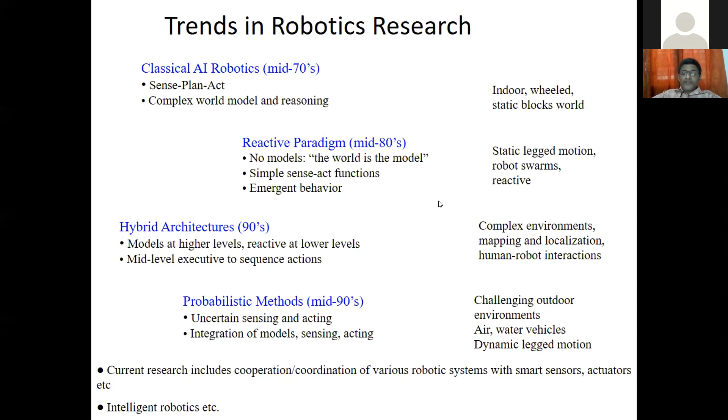I'm going to give you a basic idea, not in detail. One of the important topics - those who are in electronics or electrical background can do much more on this than mechanical people - but this is purely related to optimization and communication.

Then swarm robotics - you know what is swarm robotics? A number of robots will be there, and they will communicate with each other, and at least one robot will do one objective. Suppose you are making a swarm of 10 small robots, and suppose you are hitting a target - I will be sending 10 robots, and in between some robots may have some issue and stop working. Suppose after some time 5 robots have an issue and are not working, the remaining 5 will communicate with each other, and at least one will do the operation. So in the US, NASA and some universities have implemented this kind of swarm robotics.

Land itself, land robots.

So land swarm robot means wheel robot or tractor or any small robot - thousands or hundreds of robots communicating with each other, and at least one robot will achieve our goal or objective. This can also be done underwater, and in aerial robots too, where 100 robots communicate with each other to reach a target or achieve some particular goal. That is swarm robotics.

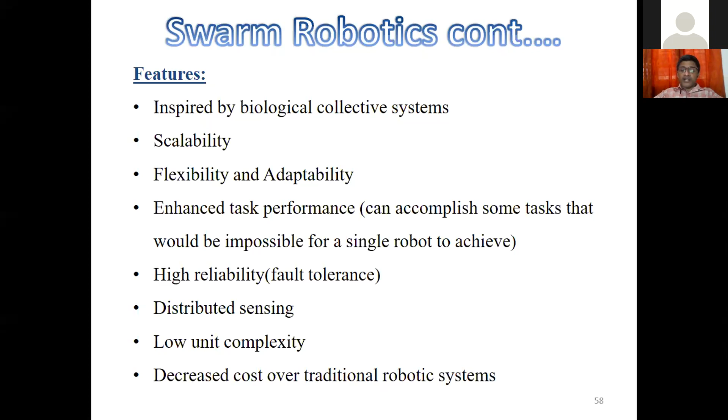This is one area which those interested in electronics or electrical background can focus on. There's a lot of scope for research, mainly aerial, but you can also do land, underwater, or aerial, or hybrid. You can integrate aerial with land, underwater, or water into a hybrid collective form of swarm robotics in this area.

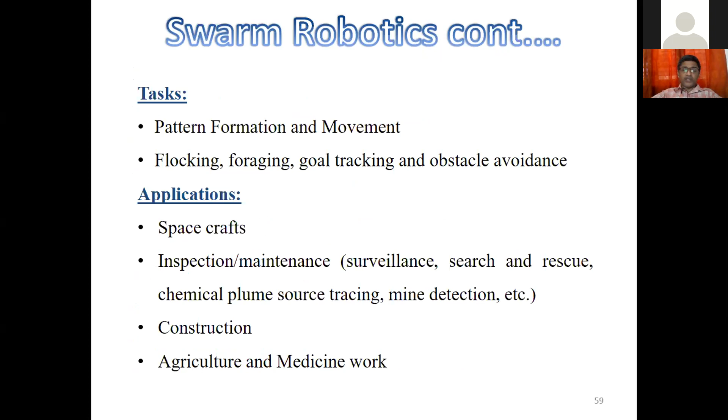The applications are very important - spacecraft inspection, maintenance, surveillance, search and rescue, chemical source tracing, mine detection, construction, agriculture, and medical robotics. That's one area. Another area is dual arm robots.

For example, we have 2 arms. Generally you see robot manipulators with 1 arm, but if you have 2 arms, we call it a dual arm robot. These 2 arms can be used for coordinated work - these robots can perform assembly operations or coordinated tasks between the hands. So that's another important research area.

These are the cameras you can implement - maybe with 1 camera also you can implement this. But human-like arms ensure safety, with an integrated controller for collaboration with the human worker. This robot collaborates with the human worker - productivity and flexibility is high, lightweight, easy to mount, agile motion, good cycle time, for parts assembly. This is another type of robot. You can either develop a dual arm robot or do different coordinations.

Even very accurate, specialized operations can be done - for example, you take a needle and thread. If the robot is able to move through the needle hole, it'll be very interesting, but it's very difficult to do that kind of operation. If a robot can do that, you can say this is a higher level of work, because we know robots aren't able to achieve even 5% of what a human can do. So there's a lot of scope in this area to achieve human-like operations.

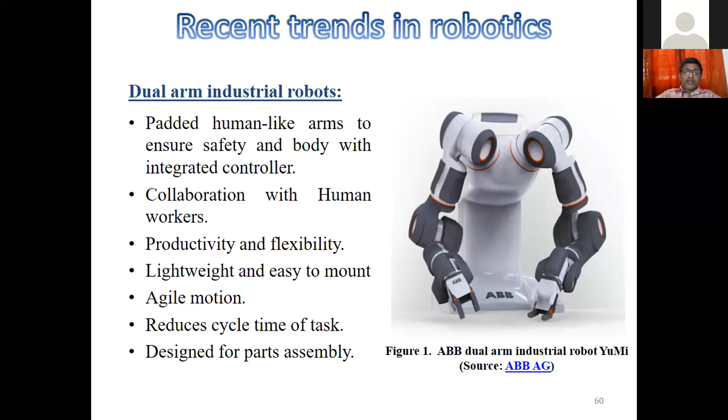Now this is another kind of dual arm robot - you can see the camera and the dual arms, with fast speed and precision, used for packaging, loading, machine loading, material handling, etc.

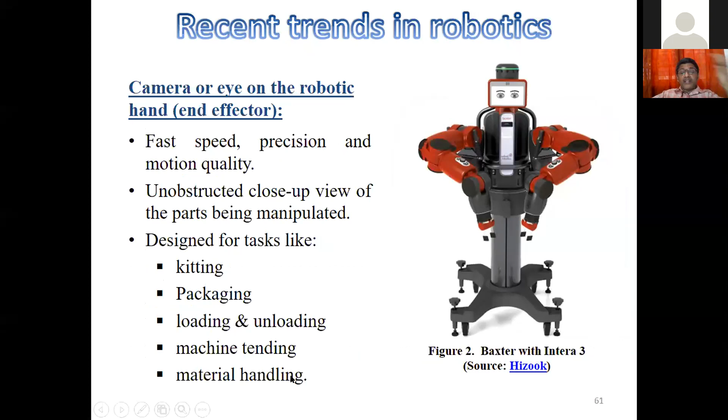Another important area is the wearable robot. A wearable robot is generally called a robot exosuit. These exosuits or wearable robots are implemented in the US military - after traveling long distances over difficult terrain, soldiers' muscles become weakened, and these problems can be overcome by using this kind of wearable robot.

Wearable robots improve and enhance the efficiency of soldiers or humans whenever required. Suppose efficiency has decreased to 70% or even 50%, the wearable robot can increase it to more than 100%. That is known as a wearable robot, or robot exosuit - soft robots for military and medical applications. There's also robot fabric for active clothing with embedded sensors, and a smart shirt - you may have heard of the smart shirt.

Depending on the climate, robot soldiers sometimes use this kind of smart shirt in the US and elsewhere. These smart shirts can be used for closed loop control of climatic conditions, adjusting body temperature based on climate and actual body temperature, so the person wearing the shirt stays comfortable.

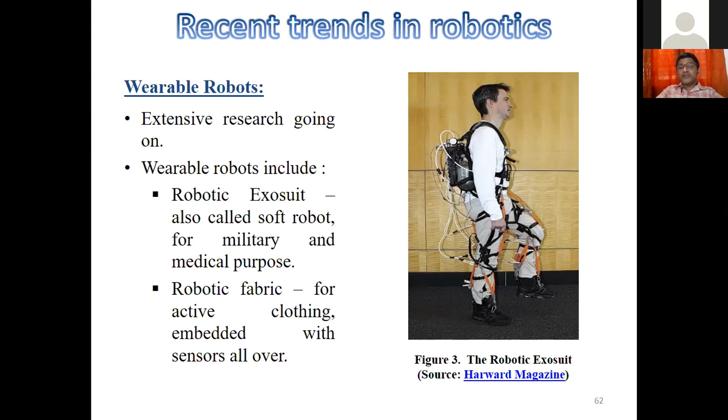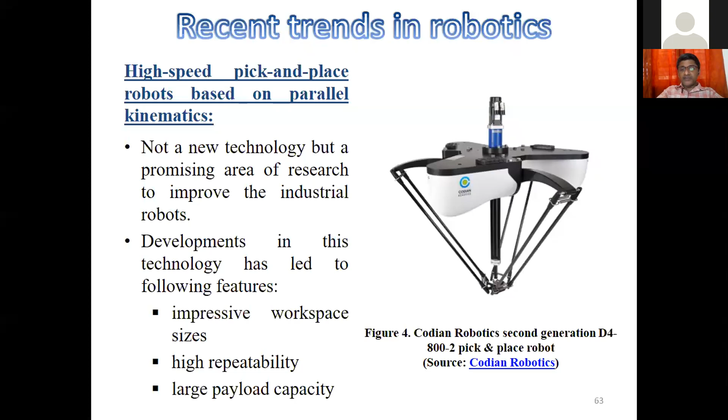Now, another area is parallel robots, pick and place operations, parallel kinematics, dynamics, and control. Compared to serial manipulators, flexibility and accuracy are higher, but the only problem is the large payload capacity and higher repeatability come with a limited workspace. We won't get as much workspace as a serial manipulator, but flexibility and stiffness will be higher for this type of robot.

Another area is prosthetics. A lot of research is going on here. Many prosthetic hands have been materialized, though still under development, including mind-controlled modular prosthetic hands. There may be EEG or EMG control, and based on that, the robot hand can be controlled to satisfy our requirements.

Suppose we think to pick an object, like taking a glass of water for drinking. The signals are analyzed through EEG, EMG, and EOG integration, and the required operations can be implemented using an EEG cap or EMG-EEG integration. That is another area, but a lot of algorithms still need to be tested and improved to increase accuracy and speed of motion.

There are few achievements in this field, like the modular prosthetic limb, which senses motion-based pattern recognition, giving not only control over limb movement but also touch sensing. You can develop a mechanism and integrate various sensors, including EMG and EEG, to implement vertical motions.

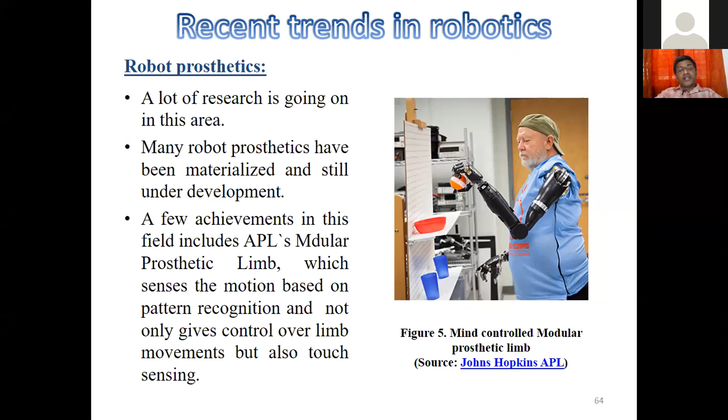For example, with a 2 degrees of freedom robot, if you're designing a teaching robot based on vision, you can make a single intelligent teaching robot and integrate EEG and EMG into it. As a teacher, what you implement in teaching can be implemented with a robot - that's another research topic. I'm posing some research problems you can take up, give to your students, or pursue yourself.

This is the unmanned aerial vehicle area I mentioned - nano drones for aerial photography and video recording, agriculture and Agribotix for precision agriculture, aerial robots, self-driving cars, unmanned drones, unmanned spacecraft, driverless trains, driverless cars, and driver-assistive cars. These are some of the important areas.

Those related to image processing, vision, and computer science - faculty and students - and even electronics students can focus on this, since they sometimes have more idea than mechanical students. This area is very useful for computer science, and mechanical students can handle the mechanical design. You can make a team and work on it.

One important shortcut to develop knowledge is, instead of going for departmentalization, you take an interest in students from electrical, electronics, computer science, or other branches of engineering including mechanical. You form a group and give some project, and they can add their own stuff and develop a lot of things.

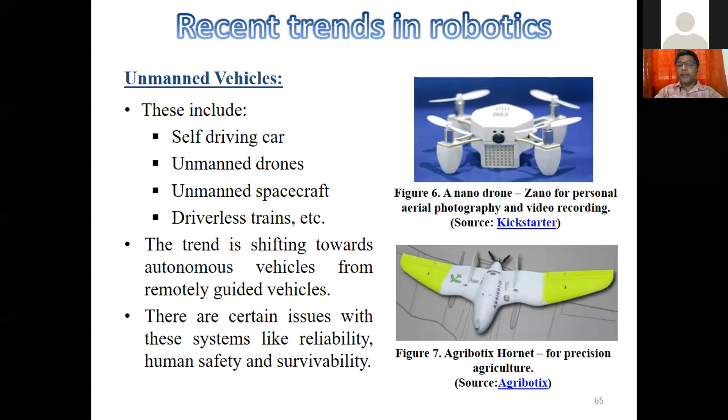Another area is nanorobotics, but in India, nanorobotics is not there. You can see a lot of universities abroad are doing nanorobotics. It's an emerging technology with potential applications in nanomedicine, targeted drug administration, used for cancer diagnosis and treatment of diseases, especially cancer, and on organic tissues like destruction of hepatitis C virus, which has already been tested.

The robots are tubular, about 20 microns long and 5 microns in diameter, coated in zinc. A micro motor powers the robot when delivered, and nanoparticles compound is directly injected into the tissue of a live mouse. So this is what I told, tested in the mouse.

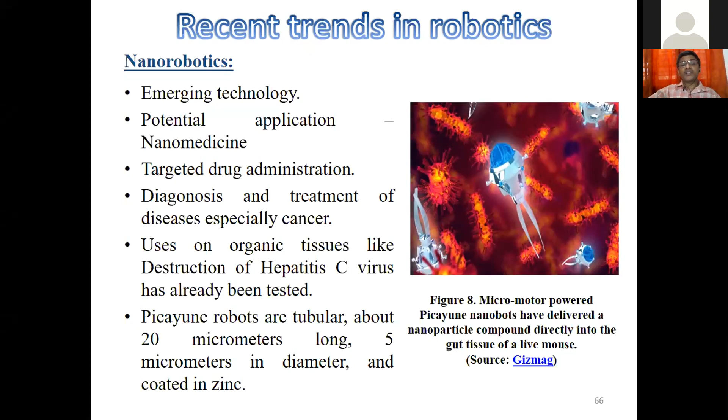So there's a lot of scope in the simulation and implementation work in this area, but we cannot do it in India, and we have to go for this kind of research in special types of universities.

Another is medical robots. You can go for surgery. Surgical robot is another area where you can develop a surgery using a master and slave mechanism. You have a master and a slave, and the slave does exactly the surgery, while the master is in the room and doctors control it so the same motion is incorporated in the slave, which can be used for doing surgical operations.

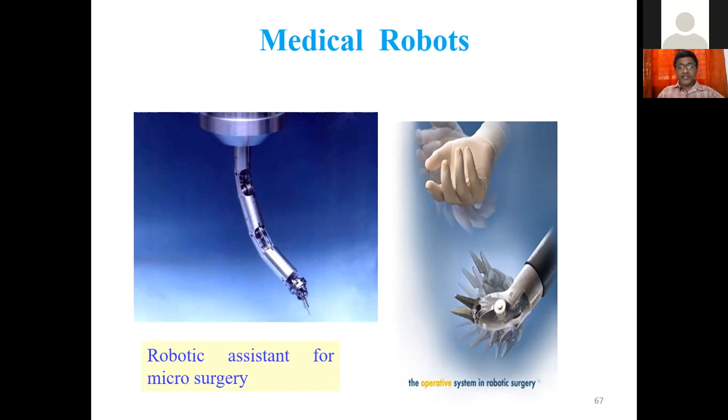Now this is robot assistive technology. There are a lot of mechanisms developed, but the real implementing part is missing, and the real output is missing. So there are a lot of things that can be integrated into assistive devices.

Another important area is agriculture robot. I have added this agriculture robotics because of the request. In agriculture, robots are used for sowing seeds, plantation, watering - these are some requirements we can use agriculture robots for. For example, I'll show you one project done by one of my students. I'll try to project that, I'll share that PPT.

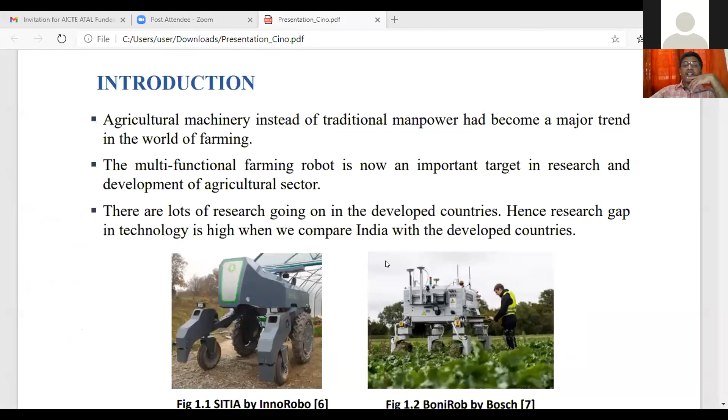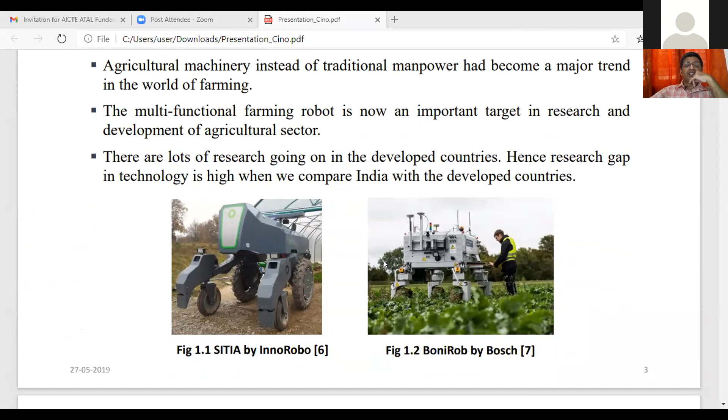In agriculture robots, machinery instead of traditional manpower has become a major trend in the world of farming. Multifunction farming robot is now an important target in research and development of agriculture. There's a lot of research going on in developed countries, hence the technology there is high compared to India. These are some of the robots for agriculture, and agriculture robot research is conducted for the following agriculture activities, so before going for this kind of research, you should know what the requirements are.

What is agriculture robot research conducted for? Harvesting, precision seeding, weed removal, fertilizing, watering of plants, spraying pesticides. Even aerial robots are now being used, almost in India also, for watering and spraying pesticides, picking, harvesting, seed mapping and reseeding, and plant health monitoring. So these are some of the requirements of robots in agriculture.

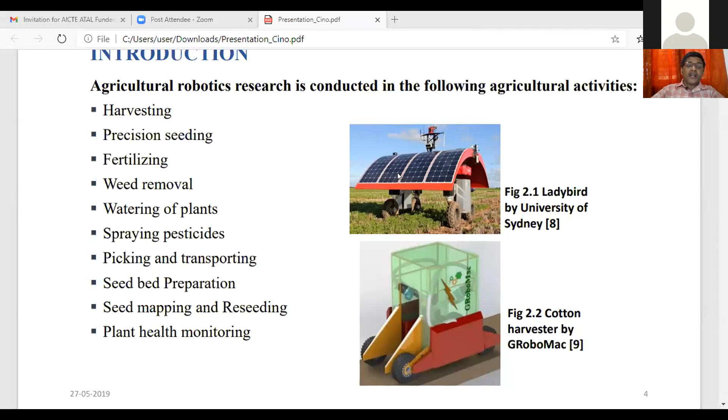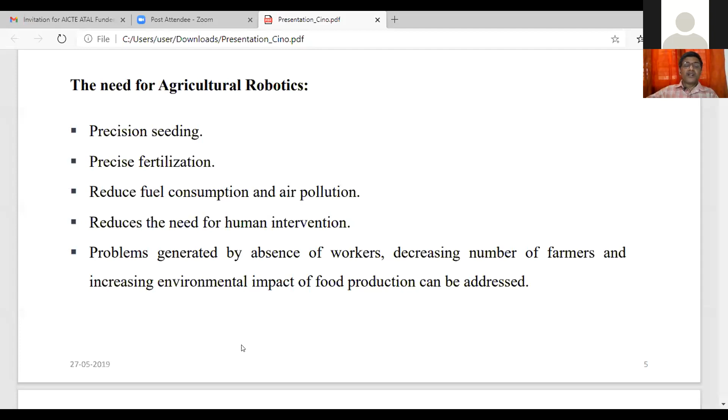See the need for agriculture robotics. See precision seeding, how precisely you can seed. Sometimes if the seeding is not proper, it will be an issue for the plant, so sometimes it won't grow. Now precise fertilization, reduced fuel consumption and air pollution, reduced need of human intervention, the problem of absence of workers, decreasing number of farmers, and increasing environmental impact of food production can be addressed. So these are some of the needs for agriculture robots.

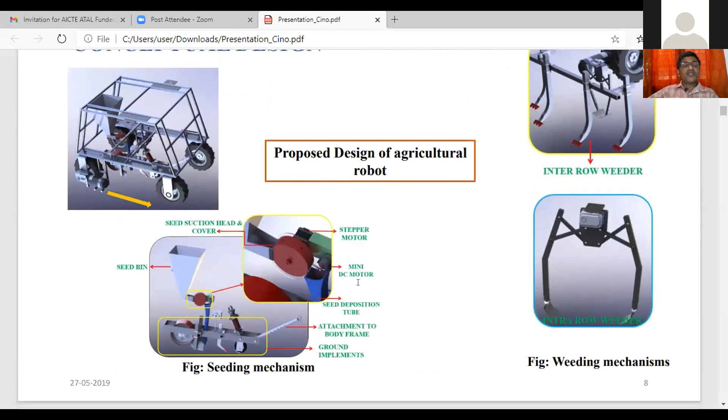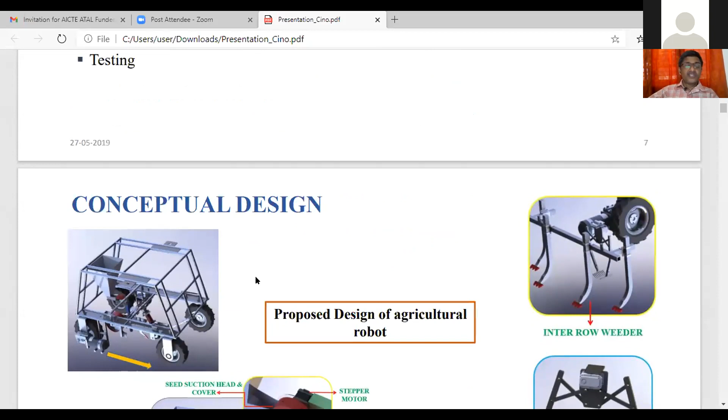What we have done is a conceptual design. The objective was to design, fabricate, and experiment with a multifunction robot for row crops in Indian conditions, implementing planting for row crops. The same robot can be used for harvesting also, if you add some other mechanisms like a plucking mechanism. If you add that, the same mechanism can be used for harvesting too.

But the problem is this robot can be used for flat terrain kind of thing, marshy field and all. We can additionally add some mechanism in the ground, in the bottom, and that can also be used. That also we have developed. But if you are going for other kinds of wheel mechanisms on marshy field, that can be improved. Only the bottom portion can be improved.

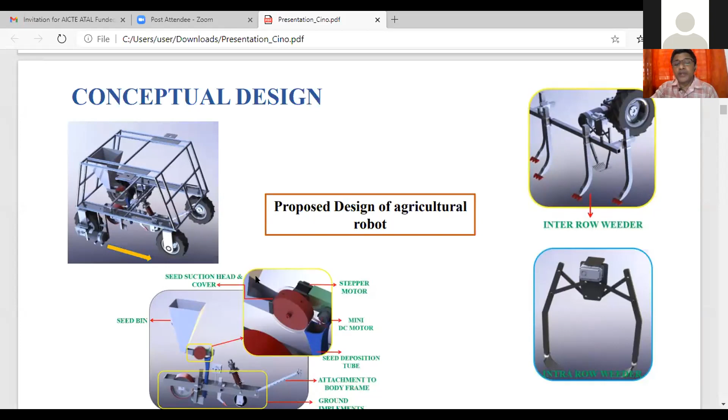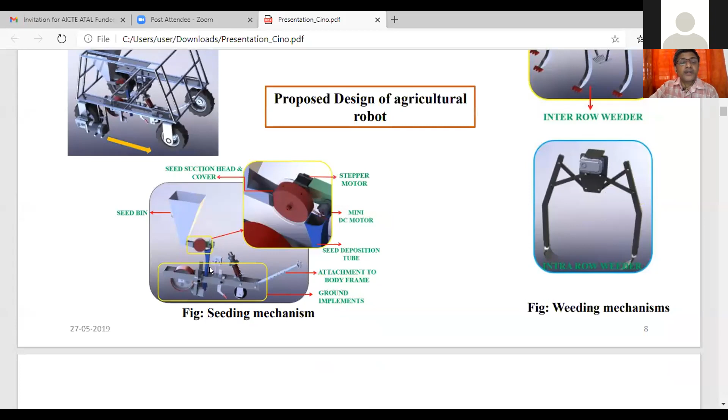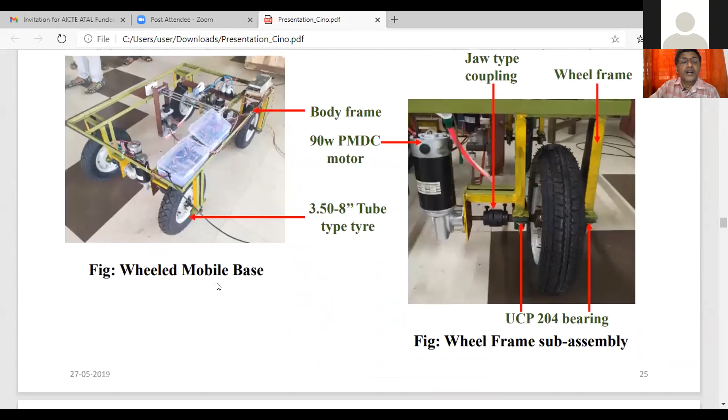Another thing is the seed feeding mechanism. You have a seed bin feeding to the mechanism, and while it's moving with uniform speed, digging and feeding is done by this particular robot. This is the robot we have fabricated and tested, with a wheeled mobile base, and we have implemented the steering.

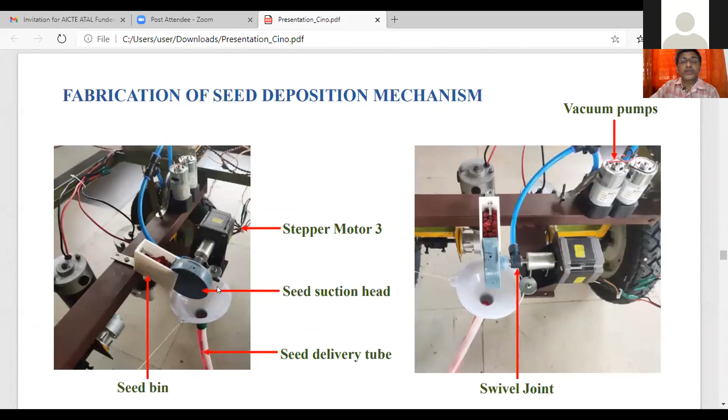So this is another one kind of robot. Then another kind of robot is, see... Stop sharing. Okay.

Another important type you can go for is related to another important issue with some poultry farms. It's very difficult to clean the poultry farms, so you can go for developing a poultry farm robot. We have developed a poultry farm robot, but I'm not having that slide.

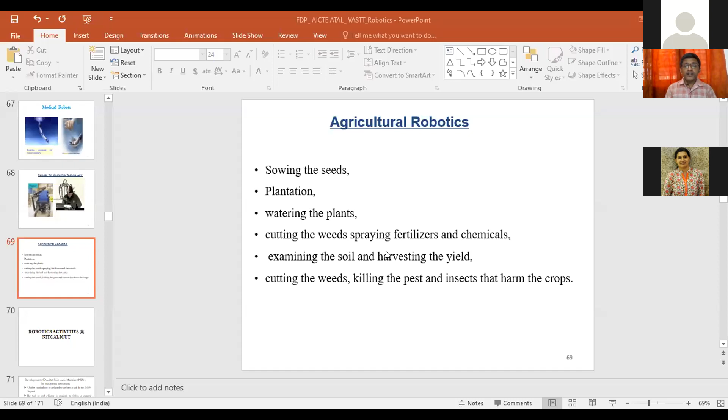We have developed a robot for watering the plants, spraying pesticides, and weeding. All those things can be done for agriculture, and also harvesting. Harvesting is another area - sorry, can you please enlarge the screen - depending upon the type of crop or item you have to harvest, you have to change the gripper, robot end effector. That itself is another research topic. Developing the end effector itself is another topic for harvesting.

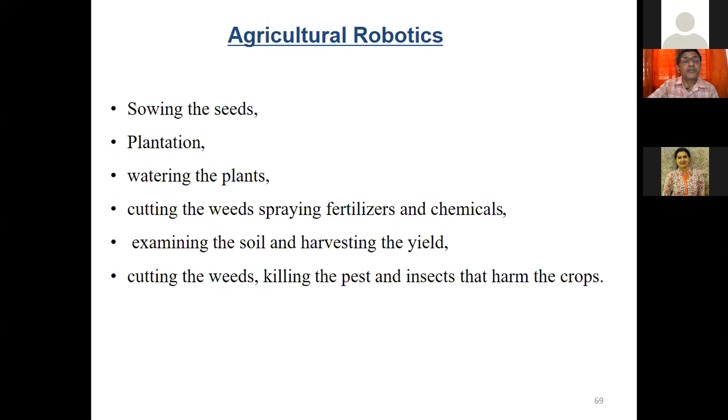So the first thing you have to do is clarify your objective. For that, you determine how many degrees of freedom you need, then go for design, then control. First you design the controller, fabricate it, implement and fine-tune the control, then test it. Sometimes you have to improve it, and finally you get a final product. That's how you develop the product. Now, this is an old slide with new slides added - I couldn't include some of the figures.

These are the robotics activities at NIT Calicut. I have developed some of these robots - I'll show you some. We have developed a lot of serial, parallel, and hybrid manipulators - serial manipulator, parallel manipulator, and hybrid manipulators - we have discussed and developed these.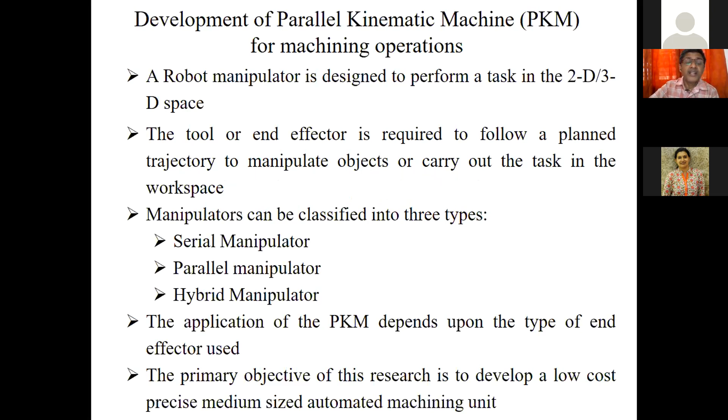Another important area is parallel kinematic machines - the development of parallel robots. When these parallel robots are used for some machining operation, we call them parallel kinematic machines, PKM. So a parallel kinematic mechanism, when used for machining operations, we call a parallel kinematic machine. That is a very important research area.

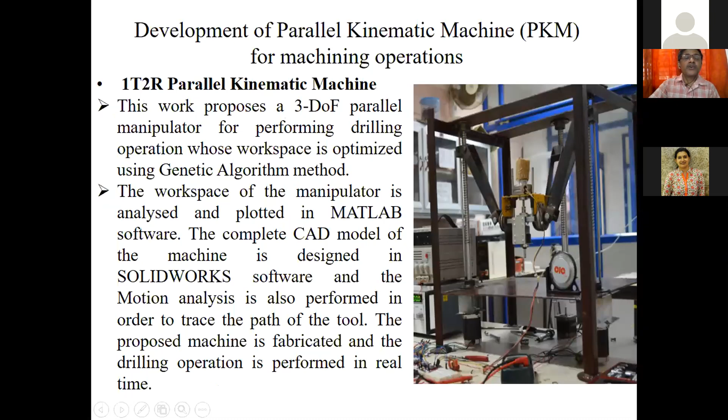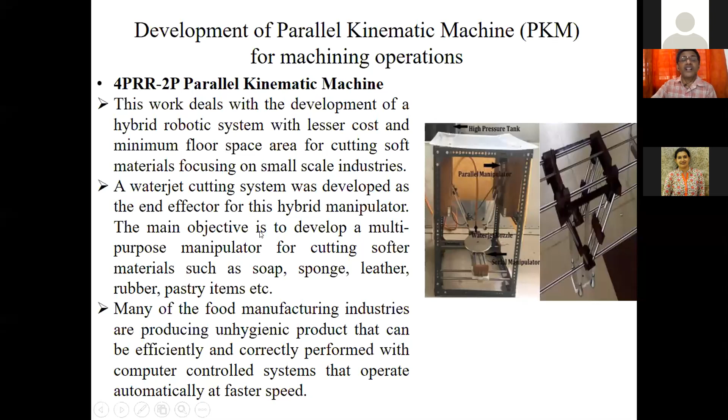We have developed parallel kinematic machines for various applications - drilling, milling, and another one called 4PRR-2P. The 2P means it's a hybrid manipulator with a base having 2 prismatic joints. 4PRR means there are 4 legs, each leg having a prismatic joint and 2 revolute joints, and the 2P is the serial part. So this is a hybrid mechanism, and this hybrid mechanism is used for water jet cutting. We have developed this particular mechanism for water jet cutting.

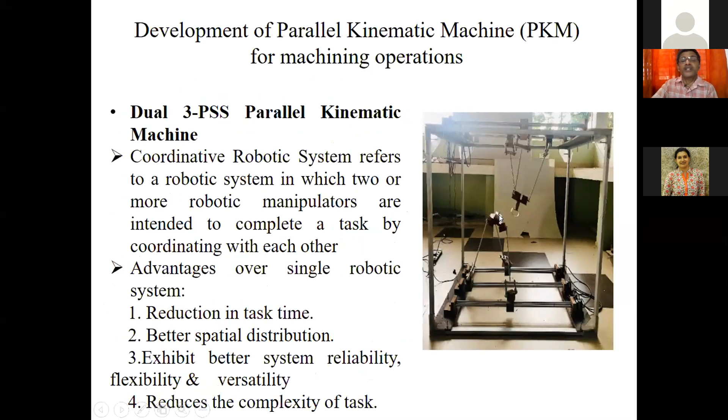Another important type is the dual arm parallel robot. This is one arm, this is another parallel arm. As you saw, a dual arm robot can have both arms serial, but here both arms are parallel. This is a parallel manipulator, and this is another parallel manipulator. With 2 arms, you can perform coordinated tasks. This is the dual arm parallel robot.

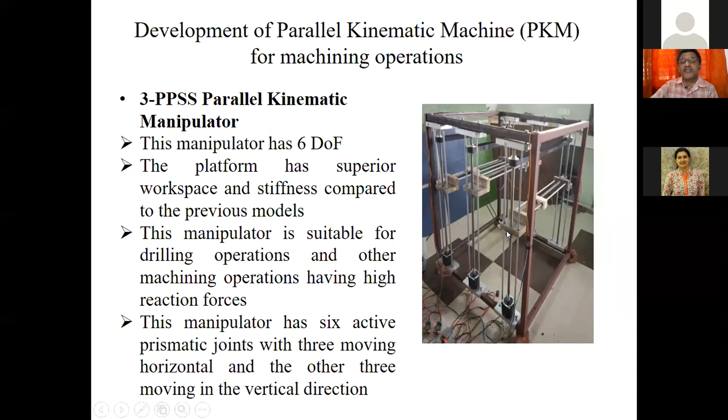This is another kind of robot. One of my PhD scholars is doing this for scanning operations. You can use it for scanning because with this kind of mechanism, if you add an end effector, it won't be force resistant - the mechanism will change. So for non-contact applications, we are developing this particular 6 degrees of freedom mechanism.

My specific area is humanoid robotics. I have done research in humanoid robotics. In the recent literature on this research area, first is leg locomotion - first static, only for standing, and next is dynamic walking. But what I did is pure dynamic walking, which means you have to reduce the size of the foot to a point so that you can walk and locomote on any kind of terrain. That is my research area.

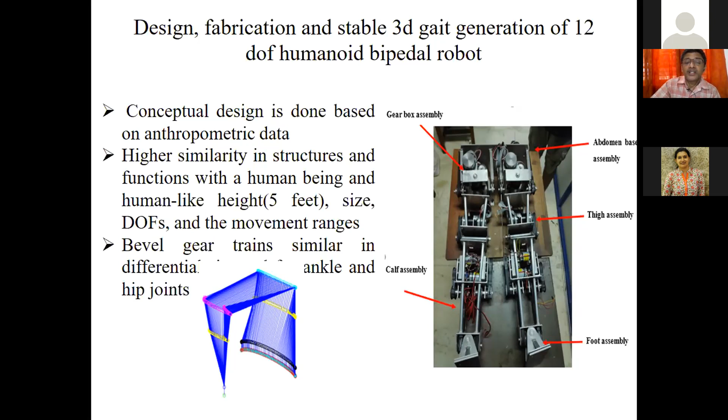One of my MTech students, our PhD student, is developing a humanoid bipedal robot. This is the structure - it's not completed yet, it's on the way. And these are the mechanisms of the humanoid robot.

After developing these robots, you can train the mechanism. You can make it intelligent also if you want. So there's a lot of scope in this area - if you're having hardware, a lot of things can be done.

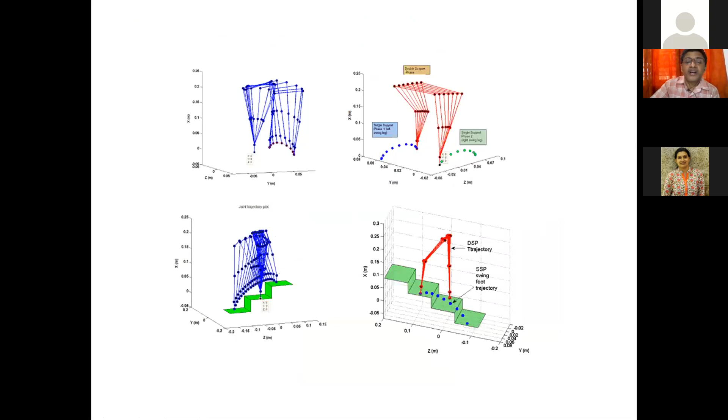This is the kinematic model of this particular robot, and we have simulated it also - simulated walking and step climbing, all can be simulated, and we have modeled it. We have developed it also, and we have had a small robot - we developed a small robot and tested this kind of motion in it. But this robot is different.

This robot is of a certain height - it's coming around 1.5 meters in height. But this is a small robot we have developed, and we have tested it.

Then another is overhead transmission line inspection. One of my PhD scholars completed development of a transmission line inspection robot. We have tested it and made a setup in the lab, but we couldn't test it online because there are electrical companies that require testing facilities and all. We couldn't do that, but the mechanism is ready for testing.

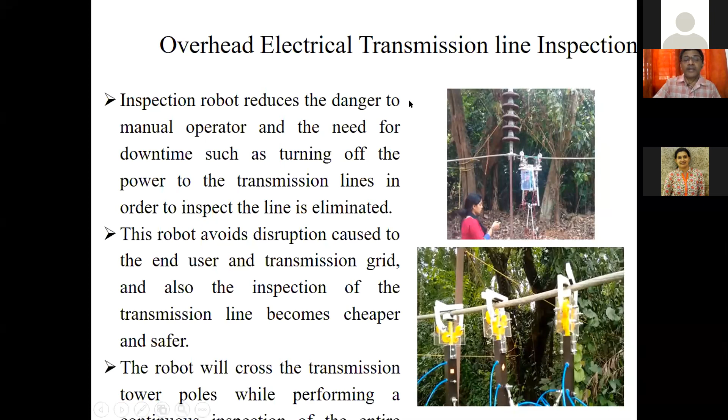We have developed a mechanism for online inspection of electrical lines - the suspension line or high voltage transmission lines. Electrical faculty or electrical students know about the significance of that, and the difficulties in crossing the tower - you have the jumper cable, and through the jumper cable it has to move. So it's very difficult to develop a transmission line inspection robot. We tried 2, 3, 4 designs, and finally implemented one mechanism, and one student has completed their PhD also in this area.

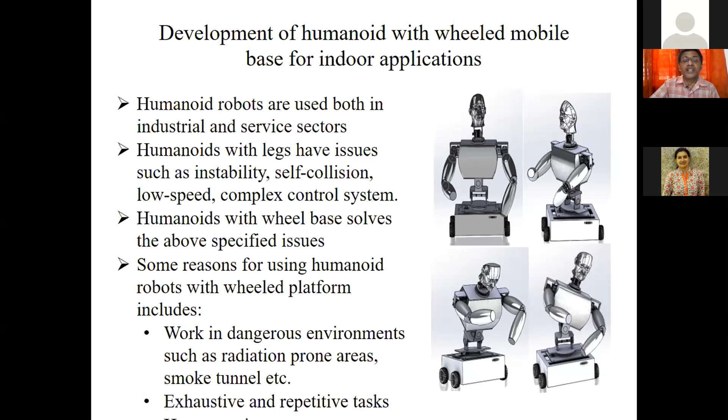And another is a cleaning robot. There are a lot of cleaning robots in the world - river cleaning robots. Pollution is one of the important issues, and we have developed a robot for cleaning the river.

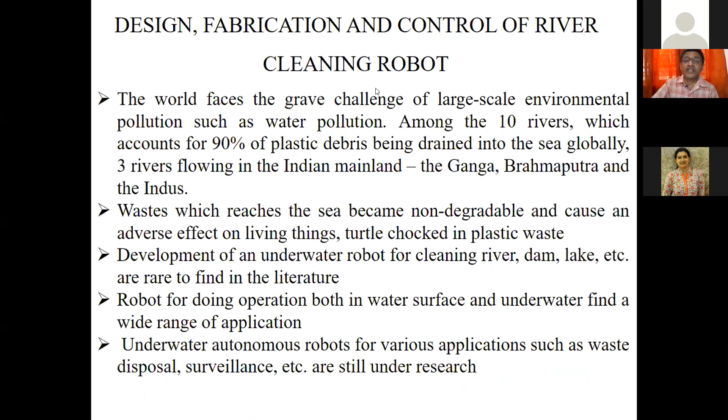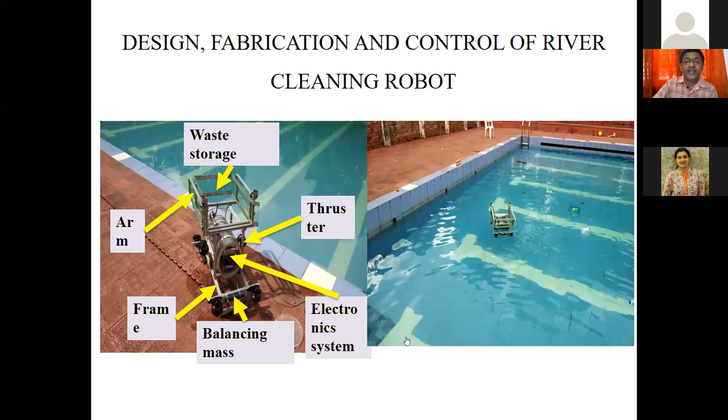This is a testing setup, and we have tested it in the swimming pool of NIT Calicut, and we have cleaned some plastic waste from the river. We have developed and implemented that in the river, and we are working on higher level depth control and more. We have participated in a competition and got a prize in Singapore. This is one of the important hardware pieces we have developed in NIT Calicut, and higher end research is ongoing - this was developed by BTech students.

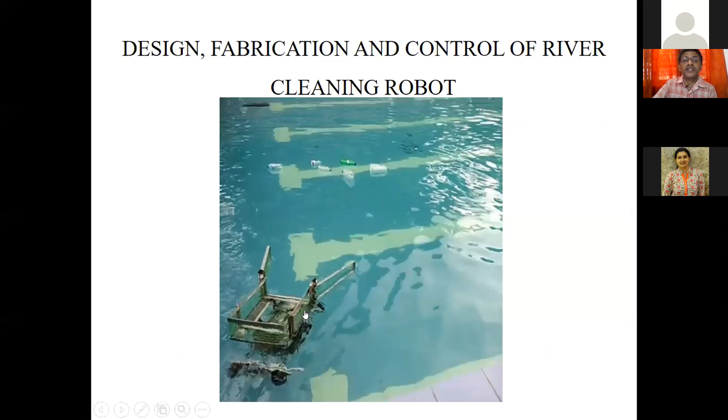Now see this plastic waste, and it moves, but underwater it's moving. There's some issue that has been solved, and depth control is done well now.

Lots of students, as I said, we have a robotics interest group doing this, and more than 70%, 60 to 70% of students are going abroad for higher studies yearly from the lab.

Research says that, not just with this kind of robot, but other human-like robots are being used for autism people to improve their capabilities, communication and all. This also can be used. Our expectation is that we can do much for autism people using this kind of robot.

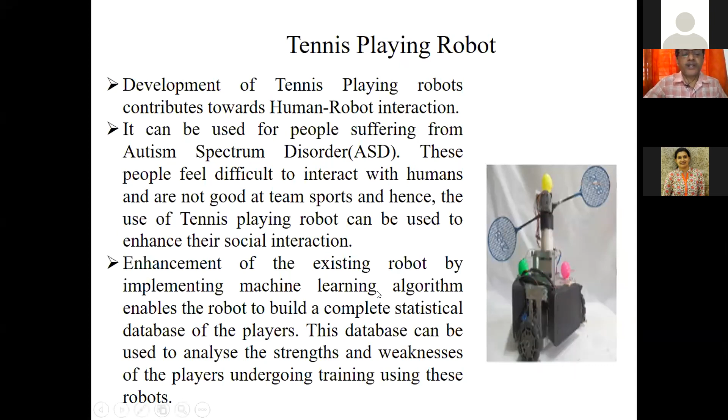Even I am involved in our TBI center, and we get a lot of research proposals from outside, and we sanction funds for patient transferring systems, such as mechanisms for transferring a patient from a wheelchair to a bed. You can search 'patient transferring system' and you will get an idea.

If you have a very good idea, there is a lot of scope for going for startups. We fund that, and ATAL is also funding these kinds of proposals.

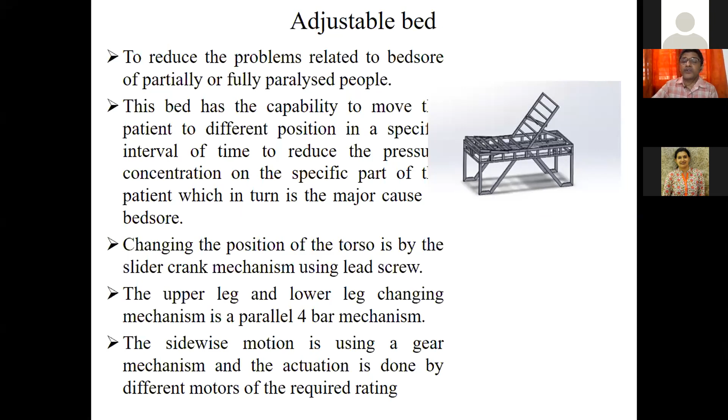Another special kind of wheelchair - I think IIT has developed one that can stand and sit. Long back we also started that, and we have modified it, and we've achieved something, though some more work remains. But the functionalities are different. I'm not going to go into that now.

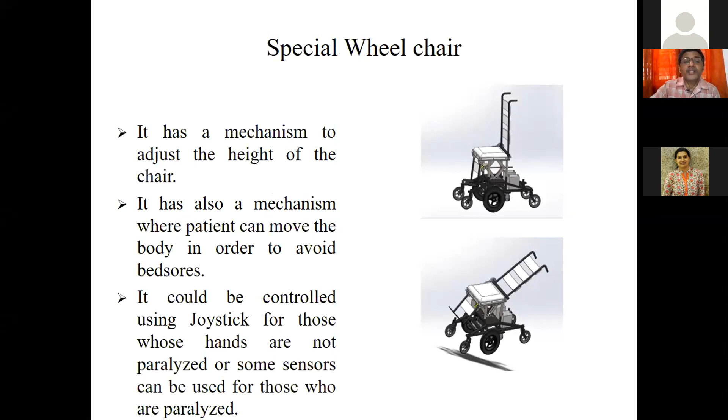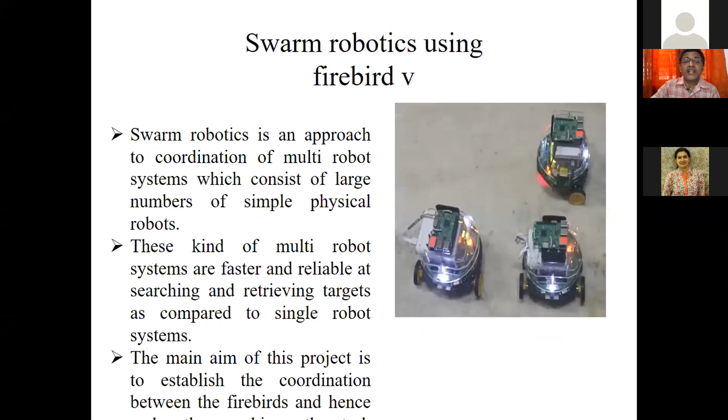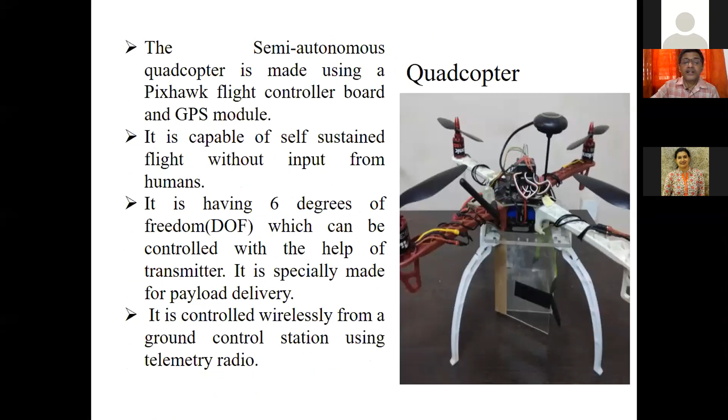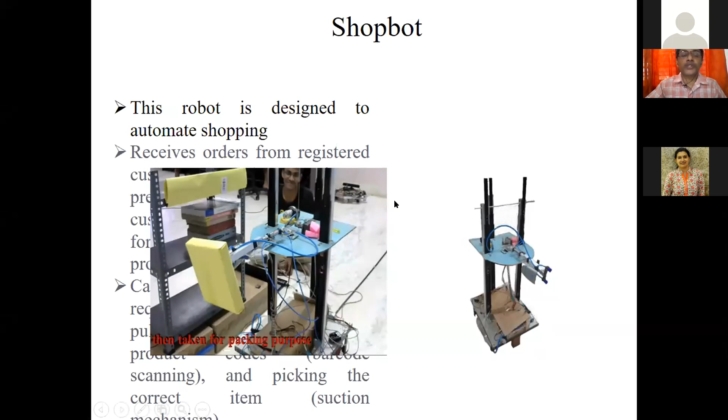This is a shop robot - you'll have a database where you enter the item you want, and the robot will go pick the object and come back. This has been implemented in our library, and it can also be used for shops, which is why it's called a Shopbot.

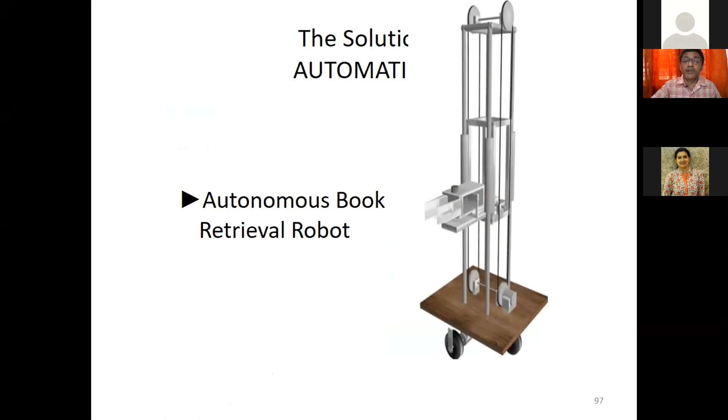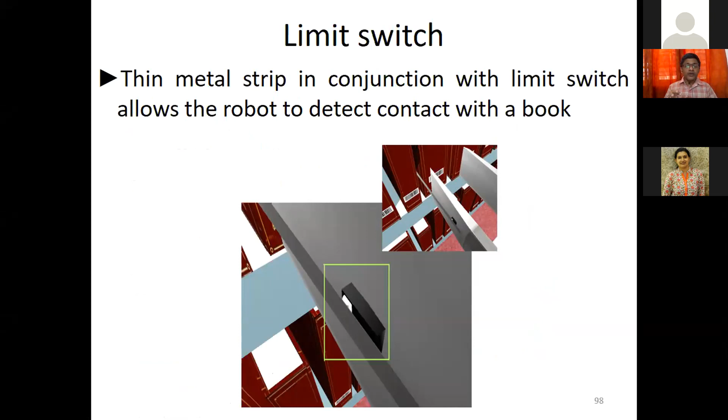Then there's the autonomous book retrieval robot, another robot I've developed. There are some issues with it, but it was implemented fine. We have a database - we enter the book name, and the robot goes and picks the book and comes back. But the problem is this is a line-following robot, so space constraints and some other issues are there.

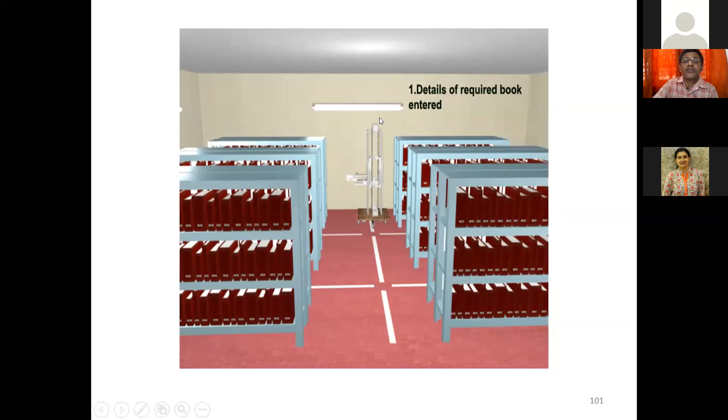Instead of that, think of maybe overhanging from the top, like having two hands overhanging at the top, moving along the top to pick and place items. These are some problems I'm posing to you - this is only a land-moving robot based on a line, and it can be changed to an overhanging one. We thought of doing it but didn't start that work. Then these involve identifying and picking the object, and it comes back.

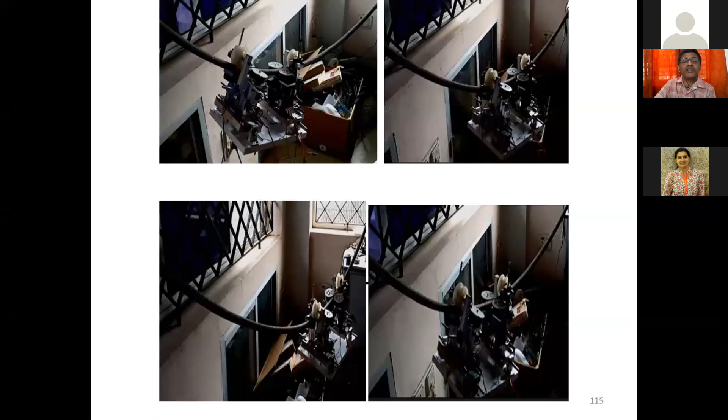Design development of autonomous transmission and inspection robot - I've already told you some of the issues. These are the robots we have tested, and this is the robot. These are robots related to the work we have done in the robotics lab.

Because of shortage of time, I'm moving fast, so the slides are moved fast. I think you got some idea of the work we are doing in the lab, and you got some idea of what things you can do with your students, or on your own.

With this we'll stop the first part, and we'll start the next session, that is robot manipulator dynamics. If you have any queries related to this, you can ask for 2-3 minutes before we start the manipulation topic. If you have any doubt, you can ask questions.

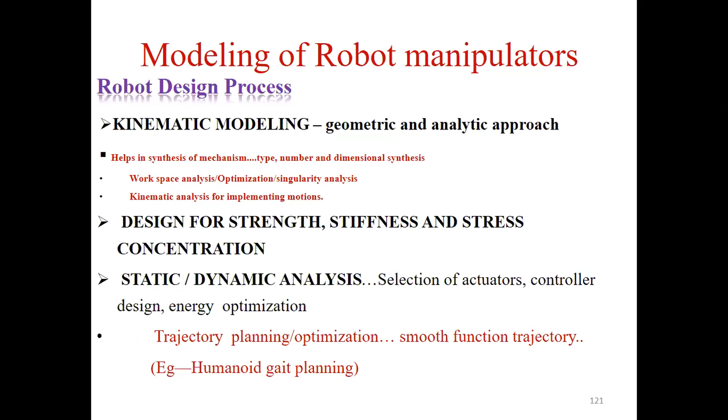I'm not going to discuss kinematics here, but let's see the significance of mathematical modeling in robotics. One is kinematic modeling is very important for design - you have to get the workspace, you have to get the dimensions for links, etc. Then static and dynamic analysis - I'm going to focus only on dynamic analysis.

Dynamic analysis is very important for selecting the actuators, minimizing energy, and for control design. Those in electrical engineering will get the idea. If you have a dynamic mathematical model, only then can you do dynamic controller design. But if you don't know the dynamic model, you can take it from a paper and do the modeling. At least you should have a clear idea about the dynamic model.

Otherwise, I'll give an example. Even in ATAL Academy, during MTech Viva as a DC member, I've seen some people designing a controller using a dynamic model of the system, but the model is taken from some other literature or research paper. The issue is, instead of theta, if theta dot is missing, or theta dot appears instead of theta, the complete model or controller will fail, and the dynamic behavior cannot be learned. That's the issue. If you know the model, you can make your own mathematical model and your own controller.

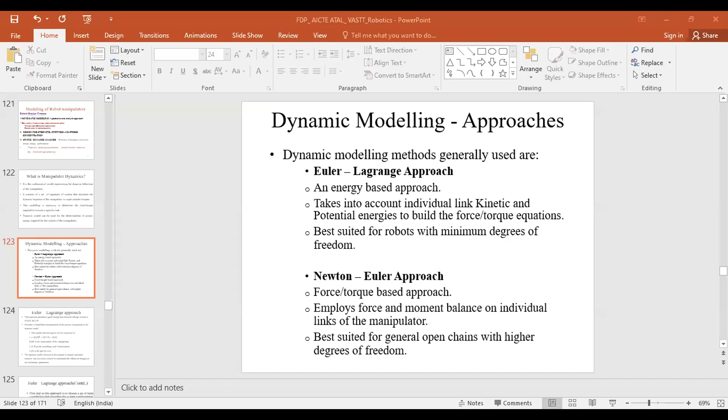Hello, am I audible? Yes sir, you're audible. Okay, sorry, there is some internet connectivity issue. I'll share the screen. The screen is not visible. I'll share it. Okay, now it's visible. Please make it full screen.

Fine. Now we were discussing the importance of the dynamic equation or dynamic model, and how force and torque can be identified. If you want to rotate, suppose you have a three link robot, after manufacturing the mechanism, you have to fix the electrical actuator at different joints. To fix the electrical actuator, you have to select the actuator, and for that you should have a clear idea about the torque requirement of the motor.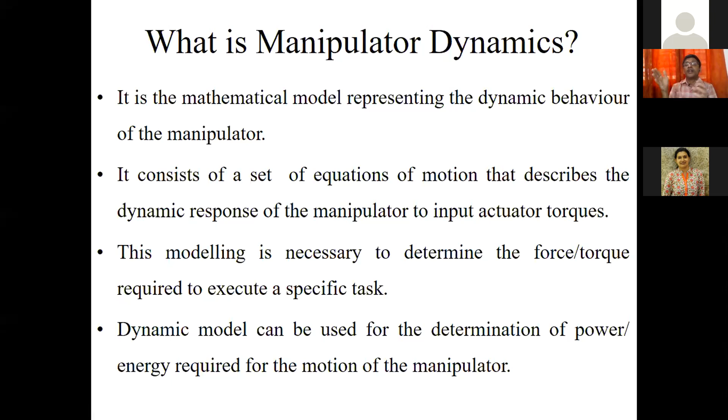How will you get that? By dynamic model and mathematical analysis only, you will get an idea of the range required. If you don't do that, what's the issue? You can purchase a robot actuator and fix it, but when testing, sometimes it won't work. You take another actuator and try it. Like that, by trial and error, you select the actuator. That is not the scientific method to select the actuator.

For that, you have to model the robot mathematically, that is dynamically, and you will get a torque equation. You have to find the torque for different operations, plot it, and find the maximum torque. After finding the maximum torque, you put a safety factor, 1.5 or depending on the complexity of the mechanism. Then you get a theoretical torque from the model or from the plot, and the actual torque after assuming the safety factor.

So actual torque, tau A, is equal to 1.5 times tau T, where tau T is the theoretical torque you get from the graph. Multiplying by the safety factor gives you the actual torque. Knowing the actual torque, you take the datasheet of the motor and select the actuator. That should be the methodology you teach your students to select the actuator. Now, the dynamic model can also be used for energy calculation.

Suppose when you are doing some operation using your hand, for example eating or drinking something. Your hand moves in a particular fashion so that joint usage and energy usage are minimum. These calculations are already being done by your neurons, which calculate the path or how your hand has to move to do these operations. While eating, we move a certain way, not another way - why? Because there will be strain. So all these calculations of power consumption are done by our neurons.

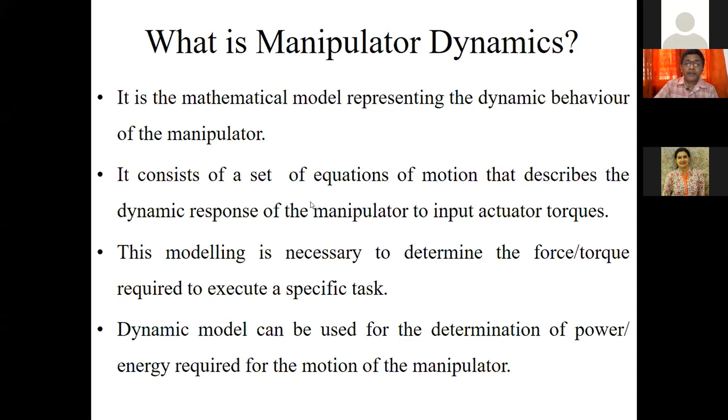So these are the advantages of a dynamic model. But you should know why we are going for a dynamic model. We can go for software also, but you won't get the complete idea from that.

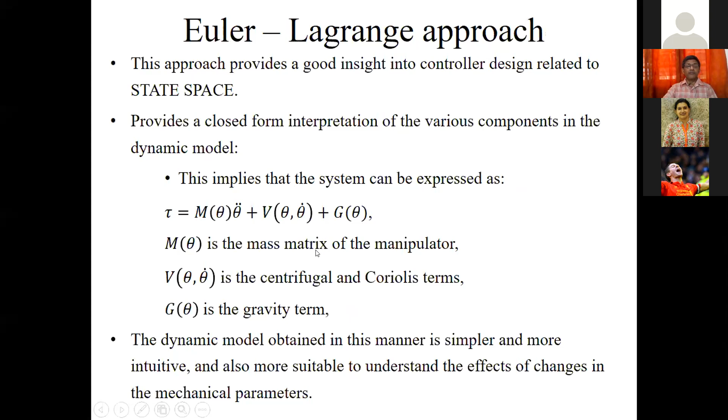We'll see what Lagrangian and the Lagrangian approach are. First step is you have to identify the joints and links - how many joints, how many links, what type of joint it is, whether prismatic, reciprocating, or revolute. You identify the number of links, degrees of freedom, number of joints, and whether each is revolute or prismatic.

After identification, you have to find the Lagrangian, known as L. L is equal to K minus P. So L(Q, Q-dot) is equal to K(Q, Q-dot) minus P(Q).

Q is the joint variable. If you have a prismatic joint, meaning reciprocating joint, you'll say D is the prismatic motion, the distance D. So Q can be taken as D. So L(D, D-dot) if it's a prismatic joint. If it's a revolute joint, Q will be the rotation, theta. So generally I use Q, which is either D or theta depending on the type of joint. K is kinetic energy, P is potential energy.

So L is equal to K minus P - that's the equation. You have to find the Lagrangian first: K minus P. So suppose you have a 2 degrees of freedom robot, or for example 1 degree of freedom, L is equal to K1 minus P1.

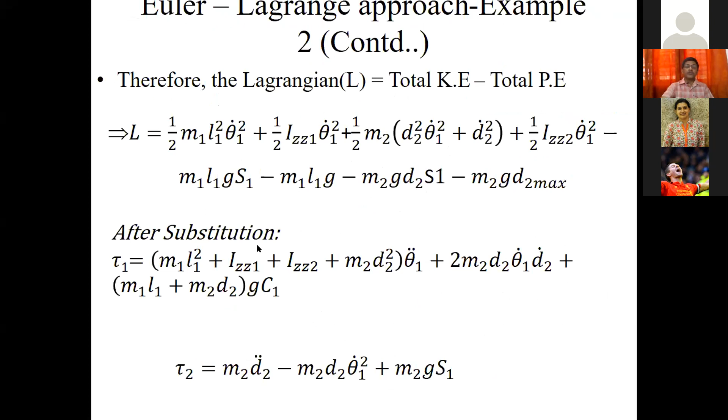You will get M theta, V theta, G theta, so you get a torque equation like this. This is the torque equation for the state space model of the mechanism. So here you have to find M theta, V theta, G theta.

For that, what do you have to do? You have to find the Lagrangian. Lagrangian is equal to what? K minus P. What is K? Sigma Ki. Sigma Pi. You find the difference.

Excuse me sir, we have 10 more minutes to conclude the session. I'll wind up now itself.

Okay sir. So now we have M theta, V theta, G theta, then you will get tau. Then after getting tau, you can use that particular model for the control design.

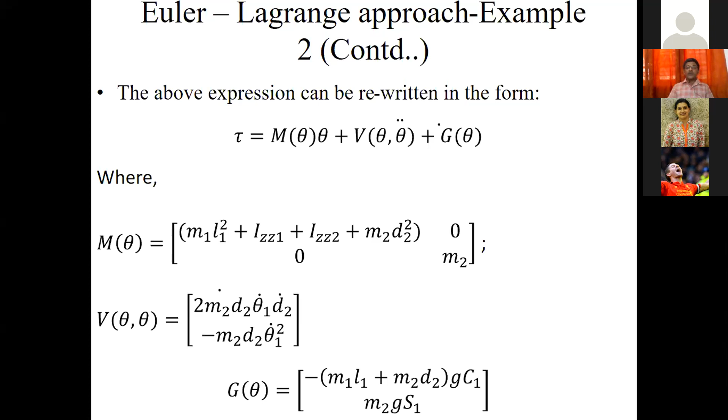So what I have tried to explain is, in the dynamic model, in the Lagrangian model, what you have to do is find out the kinetic energy of individual links, potential energy of the individual links. Then you sum the individual link kinetic energies and potential energies, find out the difference, that is the Lagrangian.

After getting L, you find out the torque by using the standard equation. Then you will get tau 1, tau 2. After getting that, you change the theta values, you will get acceleration and velocity change depending upon time. Then you plot it, you will get torque variation. After getting theoretical torque, you assume the safety factor, then you find out the actual torque.

Then that torque can be used for the selection of actuators. So after getting tau 1, tau 2, the state space model can be used for the control design. These are the points I have to tell you in the dynamic model.

So in the Lagrangian model, it's very easy. Only thing is, find kinetic energy and potential energy of all the links, add the kinetic energy terms, add the potential energy terms of individual links, find out the difference, you will get the Lagrangian. Then you use the standard equation for finding the torque. Then after finding the torque, you can plot it, and find out the torque variation of different joints.

Then you will get the theoretical torque. You can find out the actual torque by assuming the safety factor. Then you can select the actuators. And that model can be used for torque controller design.

Also, if you know tau and you know the angular velocity omega, you multiply tau 1 omega 1, that is the power requirement of the first joint. Tau 2 omega 2 is the power requirement of the second joint. So you will get an idea of the total power requirement of the mechanism for doing some operations. That also can be done, and you can use some algorithm to minimize energy.

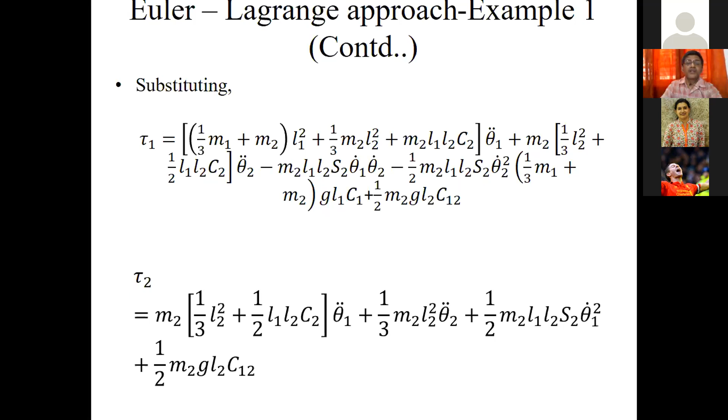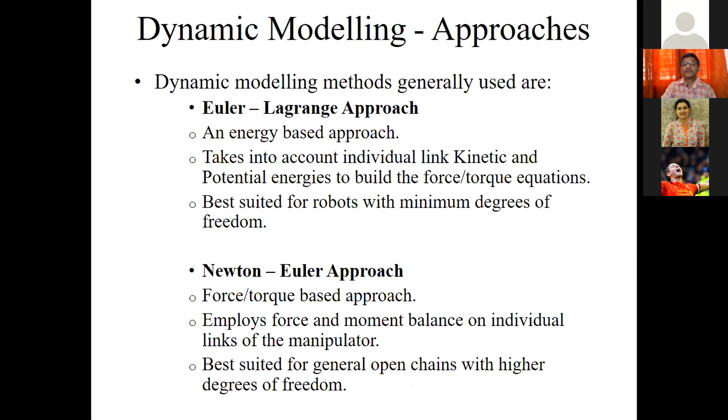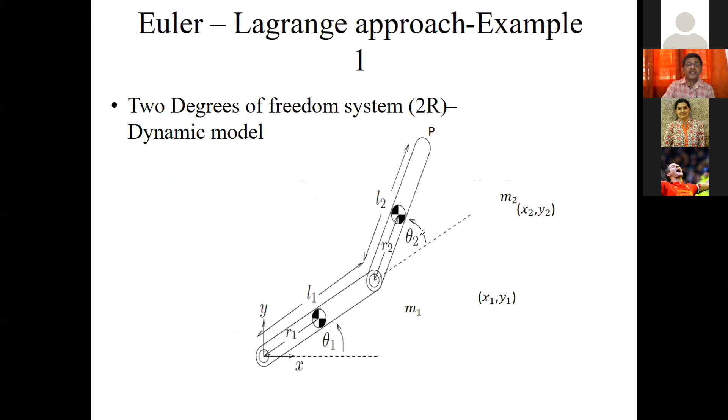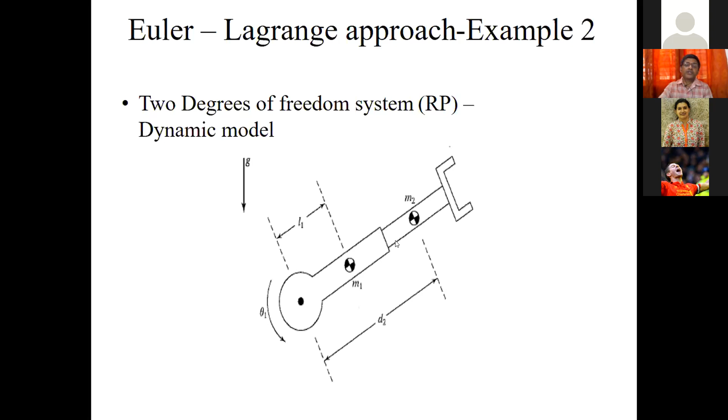For example, in this particular mechanism, if you want to find out the kinetic energy of this link, you have to consider Q as theta 1. And if you want to find out the force of this particular mechanism, here the motion is to and fro, that is D2, so there you have to use D2.

So in this mechanism, tau 1 is equal to d by dt of dou L by dou Q1. Instead of Q1, you have to use theta 1 if it is a revolute joint. You take D1 or D2, depending upon how you are naming it, instead of Q if the joint is prismatic. That is the only difference.

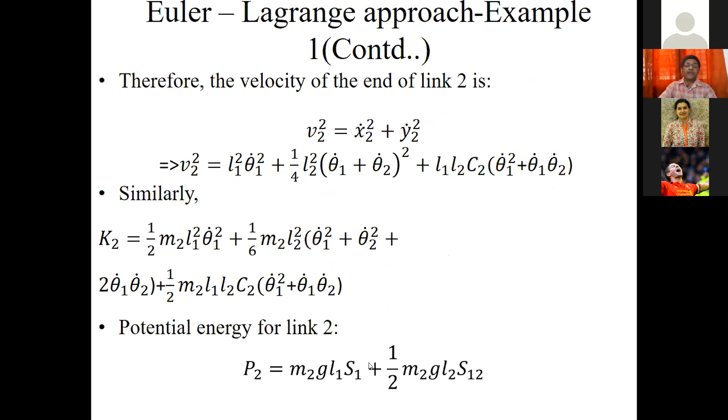But in this mechanism, both are theta 1, theta 2. So you have to find out tau 1 is equal to d by dt of dou L by dou theta 1, tau 2 is equal to d by dt of dou L by dou theta 2, like that. But in the next example, tau 1 will be the same and tau 2 will be d by dt of dou L by dou d2, because here you have prismatic d2. Here theta 1 only, here d2. That is the difference, that is Q. Clear?

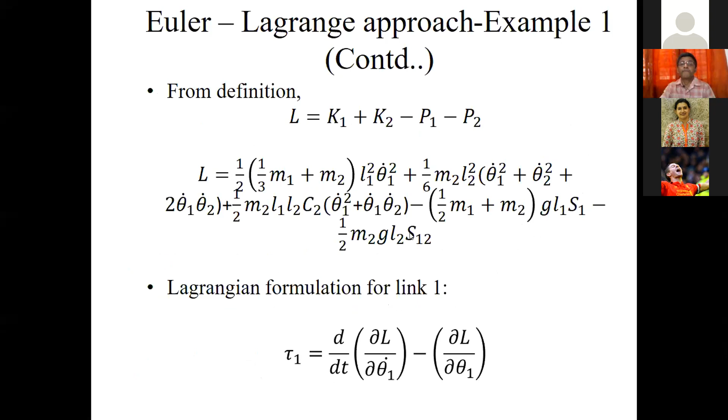Okay sir, we have another question from Dr. Srikant. Any recommendation on good books used?

There are very good books. If it's for starting, if you are new in this area, use Robotics and Control by Saeed B. Niku, S-A-E-E-D. That's a very good book for beginners, published by Prentice Hall. You can use it for getting more problems. There are some mistakes in the printing, but it's still a standard book.

There's also Robotics by Nagrath. And you can use Robotics and Control by Craig - that's another good book, but Craig is a bit advanced, so if you're having some basic idea, you can go for that. And Robotics and Control by Vidyasagar is another book.

Robotics related, Schilling is a very good book, author Schilling. So Schilling, Saeed B. Niku, and Mittal are other books. Mittal is also a basic book - Mittal and Nagrath - but there are some printing mistakes in that. You will get more problems in Mittal. Vidyasagar, Mittal, Saeed B. Niku - all cover Robotics and Control applications.